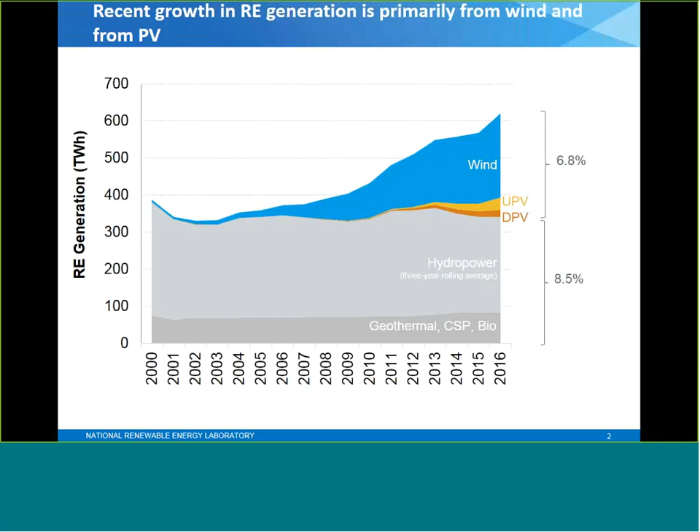So in terms of starting to make projections for the future and what that might look like, we always start with cost and performance projections. That is our companion product to this standard scenarios work, our annual technology baseline. This is using our 2017 version - these are NREL's cost and performance projections for electricity sector generation technologies through the year 2050.

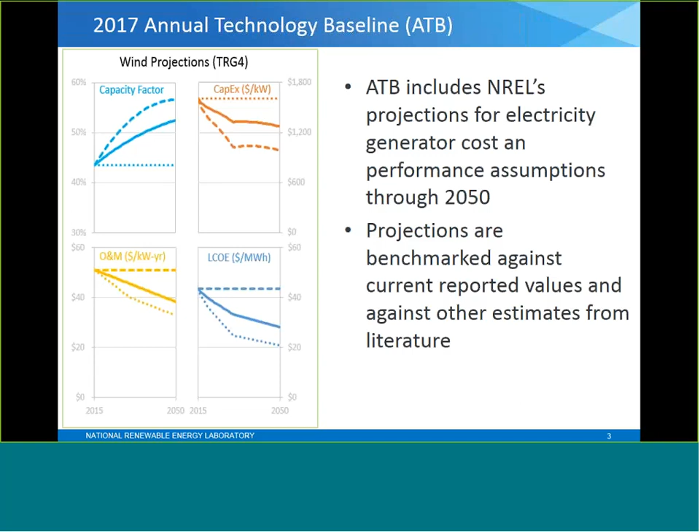So we spent a lot of time developing these projections, benchmarking them against other current reported values from the market, as well as other estimates reported in the literature, and this forms the basis for making projections into the future. We also pull things like fossil fuel cost projections from the Annual Energy Outlook, and demand growth from there as well, then roll them into our modeling tools.

So we're primarily relying on two models to look out into the future. One is the ReEDS model, the Regional Energy Deployment System, which looks at the bulk power system side of the electric power sector. It has a lot of spatial resolution. We're explicitly accounting for renewable energy integration constraints, and representing transmission.

And then for the distributed side of things, we're using the dGen model, or distributed generation model, that looks at a county level resolution, looking at individual customers and how they might or might not adopt distributed PV. So the combination of these two things, we take all of our annual technology baseline cost and performance pieces, run them through our models, and create this ensemble of scenarios.

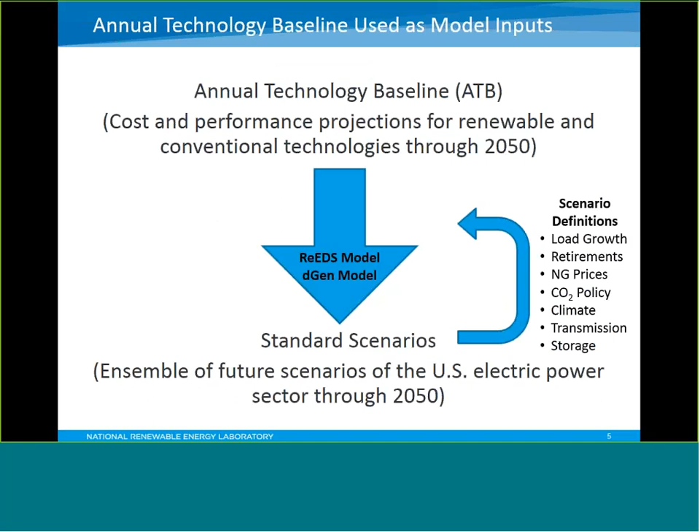And we have a lot of different kinds of scenarios that we look at. Things like differences in load growth, different retirement scenarios, natural gas prices, CO2 policy, climate scenarios, transmission scenarios, storage cost scenarios. So we've got a whole bunch, I think there were 26 scenarios we looked at, really looking across the range because we know that the future is not a single line. Well, it will eventually become a single line, but it's hard to say what that single line is. So we want to look at a wide range of futures to see what kinds of trends show up consistently across many different scenarios.

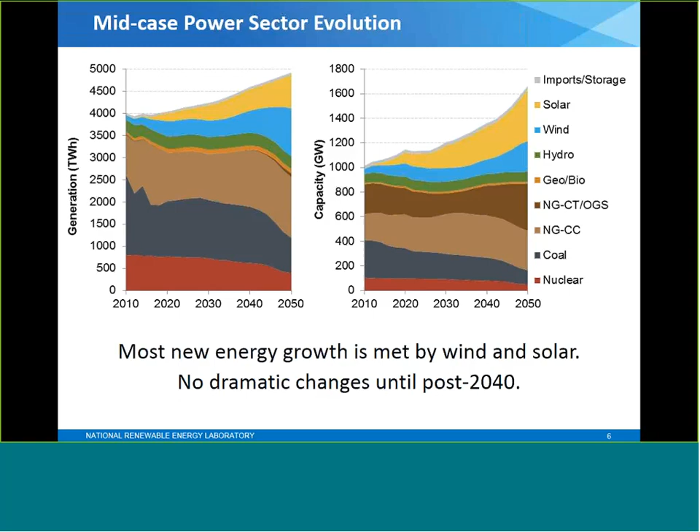Hey Wesley, so do we see some states having over 50% renewable energy in that bottom figure? Is that what I'm seeing? Oh, certainly - you look at Iowa there, and it's well over 50%. It's obviously exporting quite a bit of that energy to other regions, but of its total generation mix, it's definitely exceeding well above 50%.

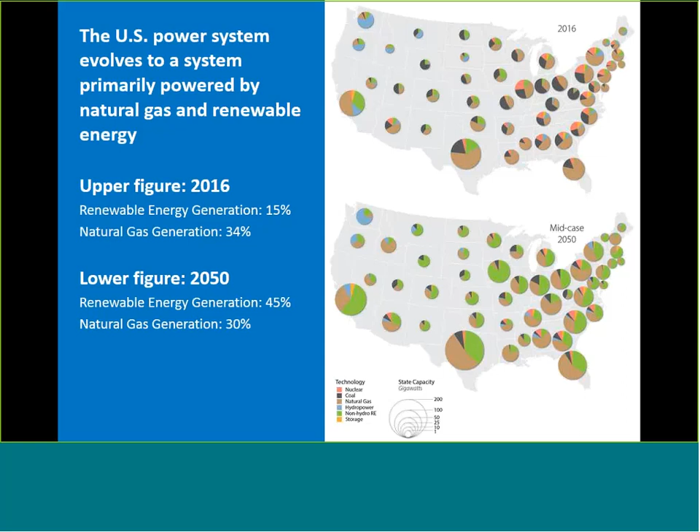There's only a very few cases where it stays flat for a long period of time, typically where renewable energy costs don't change from today's prices, or where natural gas prices stay extremely low in the $2 to $3 range for 20 or 30 years. So there's a lot of potential here for renewable energy.

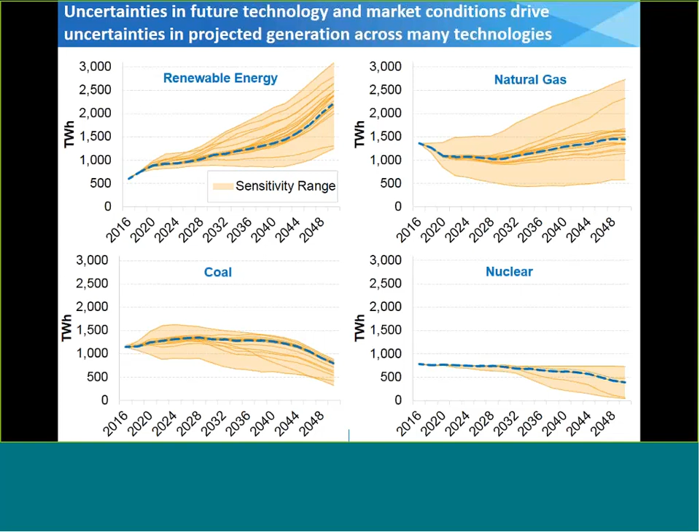This has a lot of promise for renewable energy. Renewable energy wouldn't just be competing against other new resources, but if you're now competing against natural gas fuel prices, you could compete against existing resources on the grid. That gives a whole different dynamic for what could happen with renewable energy deployment into the future.

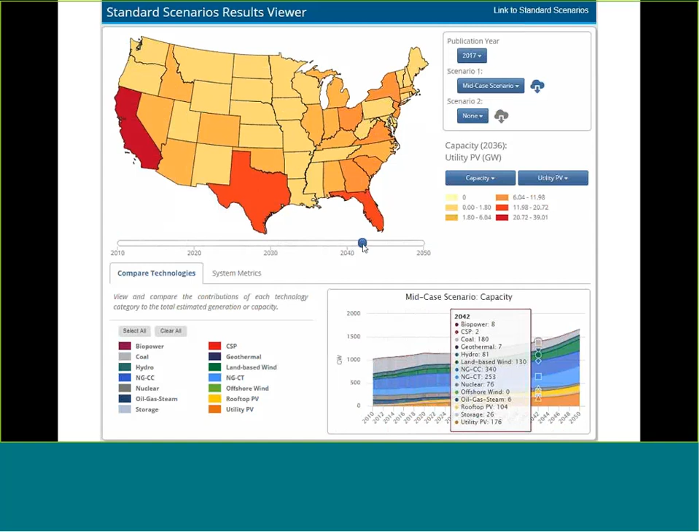Here we're showing state-level utility PV capacity over time. You could look at other scenarios, compare scenarios with each other, look at different technologies. This is all available for you - you can download the scenario data and look at it in more detail. We encourage you to go look there. I'll close out by providing you the links to the full report as well as to the viewer itself, where you can get this data.

And feel free to follow up with me if you have any questions about any of this material, or if you just see things in there you're really interested in talking more about. I'd be happy to engage with you there.

Yeah, Wesley, while we do the transition to get Jennie queued up, we had one question from Drake Bartlett. He asked about the coal generation we saw in your graph, and I think his question was originally about capacity, but you're showing energy. If we look at that graph, we see a slight increase in generation from coal plants between about 2024 and 2036 or so. Is that attributed to increased utilization, or do you actually anticipate coal capacity getting added in the mid-case?

No, that's a good question. So yeah, we don't see any new capacity additions for coal in any of these scenarios. It's hard to build a new coal plant. They're relatively expensive, but the increased generation is essentially from additional utilization of existing coal plants. This is mostly because natural gas prices are assumed to come up slightly in our reference case, and if they do come up, that gives coal a bigger advantage versus natural gas in a 10 year time frame.

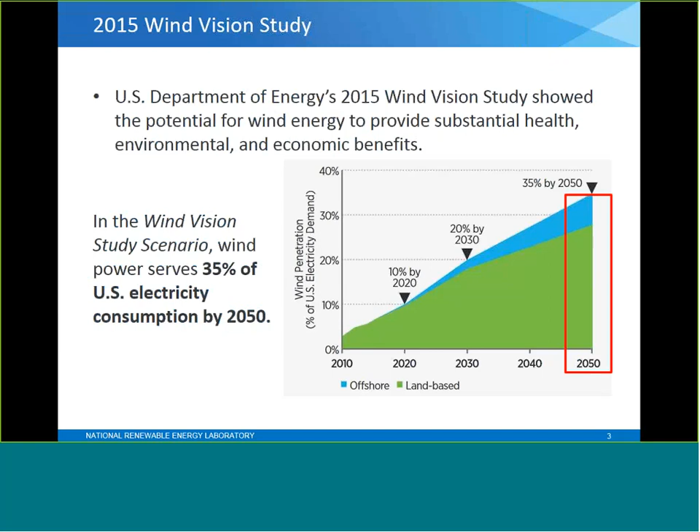For the remainder of the presentation, I'll be focusing on that final year, 2050, which shows the high wind penetration. As you can imagine, if the U.S. is going to achieve 35% wind, the regional penetration of wind could be substantially different than that. Particularly in the middle of the U.S., where we have a really good wind resource but less load than on the coast, we see penetration levels upwards of 50% in the Wind Vision study.

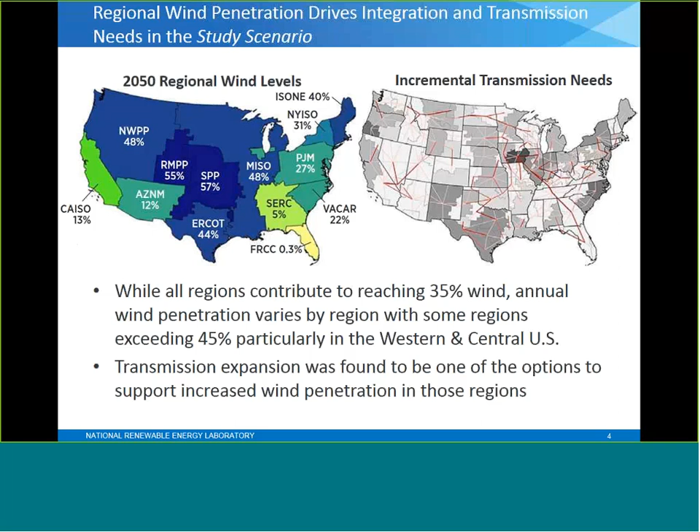So as you can imagine, the Wind Vision study found that transmission would be an important part to support increased wind penetration in those regions. Following on to that, we did some work here at NREL looking at the ability of the grid to operate such a high level of wind system.

So we did follow-on analysis by creating a Wind Vision-like scenario of the western U.S. I should note the reason why we didn't look at the entire U.S. like the Wind Vision study did was because with the high level of fidelity we wanted in our modeling, the whole U.S. isn't at the moment computationally tractable. NREL is working on that, but in the meantime we stuck just to the western part of the U.S.

As you can see from the map, wind penetration varies substantially by state, with really high wind levels in those Rocky Mountain states of Montana, Wyoming, and New Mexico.

So we wanted to analyze the operation of the grid at an hourly level, so we used a unit commitment and economic dispatch model that's commercially available called PLEXOS.

And to use PLEXOS, we start with a database of the Western Interconnection that incorporates every generating unit within the footprint, details about those generating units such as maximum capacity, heat rate, ramp rate, et cetera, along with the transmission network topology, including expected transmission builds through year 2030.

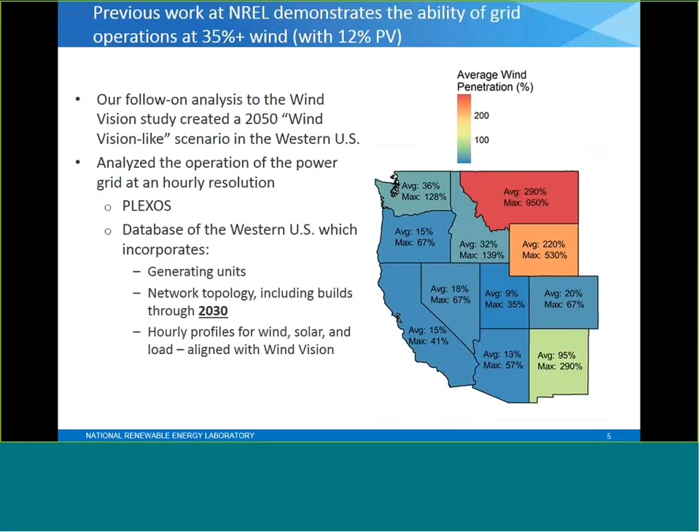The first thing you can imagine is that when we're looking at the network topology of the year 2030, but wind levels from the year 2050, we might have some wind integration issues.

So we also analyzed 3 transmission build-out scenarios that are shown on the top maps of this slide. Our first transmission build-out scenario, we added 4 new lines that have actually been proposed for the western U.S. to facilitate wind energy deployment.

And then we further added on to those scenarios with our second and third transmission build-outs. And what we saw when we do an annual run of the operation of the power grid, one of the results of interest is annual renewable energy curtailment. That means renewable energy that is available to be used but can't, for various reasons.

One of those reasons could be the inability to get wind from where it's generated to where it's needed, or it could be an inability to turn down your conventional generator fleet. So there's a lot of things that could drive curtailment, but we found in this case, with our transmission builds, we were able to substantially reduce that curtailment.

In fact, we did a bounding scenario called the copper sheet scenario, where we eliminate all transmission constraints, and what we found was less than 1% annual curtailment. So that really indicates our results that in this case, our curtailment was almost entirely being driven by lack of available transmission.

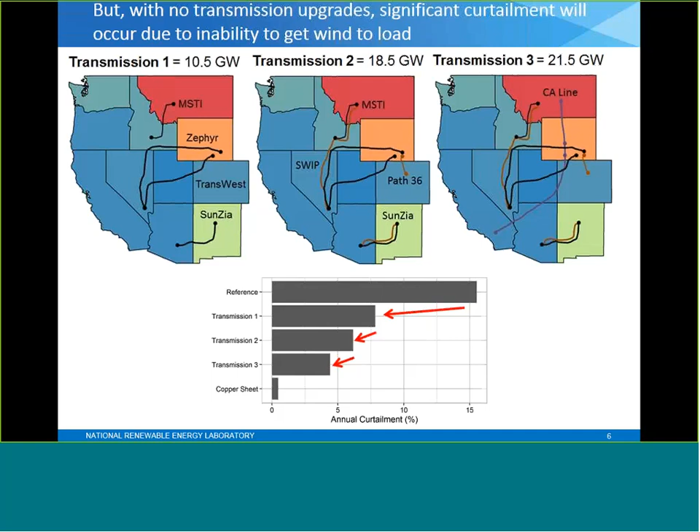So while the transmission build-outs from the previous slide that we evaluated in that study might show very favorable economics, or seem like no-brainers from the standpoint of integrating wind energy, there are other substantial barriers to building large-scale transmission.

Siting, regulating, permitting can all be a real challenge when you're trying to travel potentially thousands of miles with tons of metal. And another real issue is evaluating who's going to pay for the line to begin with, and then how do you allocate those benefits once the line starts being used.

So another possible method to combat wind curtailment is energy storage. You can potentially avoid some of those issues that you might have from transmission. So we set out to evaluate whether batteries plus wind would make sense.

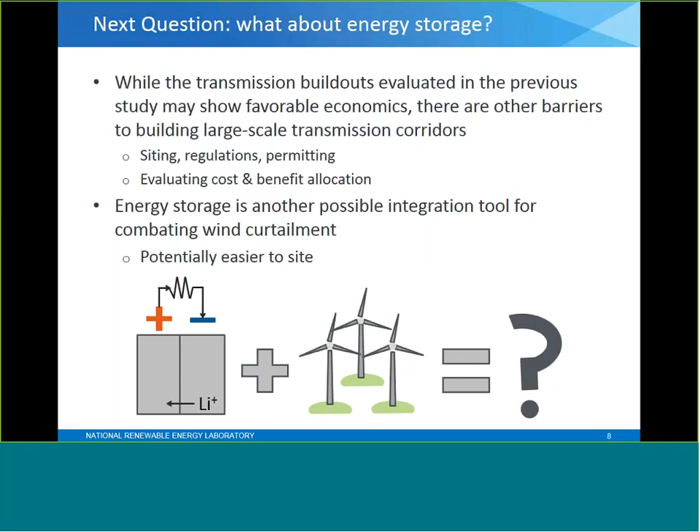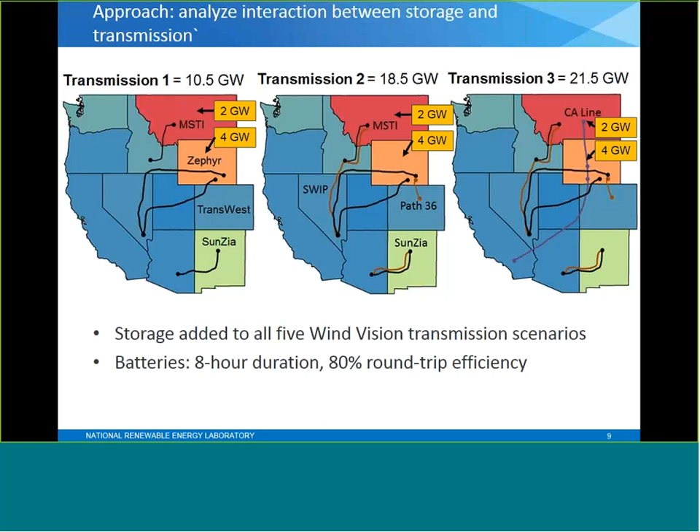Our approach was to start with the same 5 transmission scenarios we've just been discussing, and then add 6 gigawatts of energy storage to each of those scenarios — 2 gigawatts in Montana, 4 gigawatts in Wyoming. These are long-duration batteries with 8 hours of duration and an 80% round-trip efficiency. We basically did the same annual simulation for all of those runs.

Our first result shows the annual renewable curtailment, as we've been talking about, for each of these runs. Our first result was really that both energy storage and transmission reduce curtailment, but transmission is more effective. On the y-axis we have renewable curtailment, and on the x-axis we have our 5 transmission scenarios. What we find is that, shown in purple, transmission is very effective at reducing curtailment. Storage is also effective, but especially compared to the base case, it's just not nearly making the same dent that transmission is.

The reason for that is that wind has extended periods of curtailment — they last longer than 8 hours. In our base case, 40% of the curtailment events lasted longer than 8 hours, and the longest one was about 330 hours. So storage can charge for the first 8 hours of that event and then has to just sit idly until the end of the event before it can discharge its energy. That really cuts into the capacity factor for storage and thus how useful it can be for combating curtailment.

In addition to that, even if storage could constantly charge and discharge, it has a theoretical maximum capacity factor of around 40% due to those efficiency losses, whereas your utilization factor of transmission lines could be substantially larger.

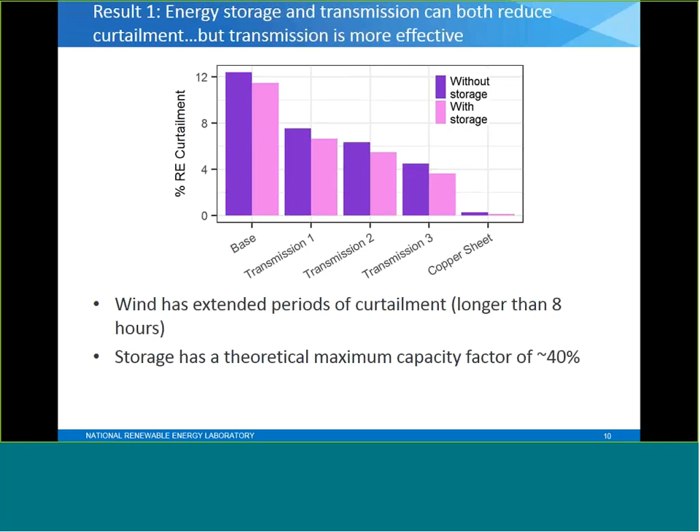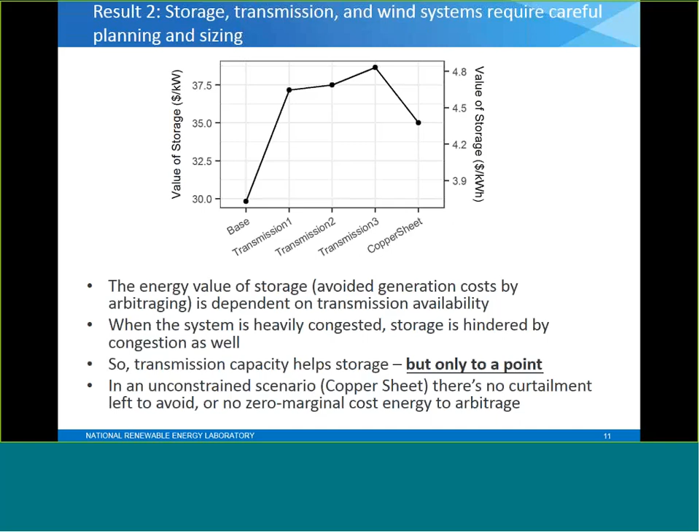Our third result is that it matters where storage is located. For this sensitivity, we took that 6 gigawatts of storage and moved it from Montana and Wyoming, where the wind is, to Southern California, where the load is. Southern California has expensive gas generators that have to turn on to help serve their peaking load, so we wanted to see how storage could impact the system there.

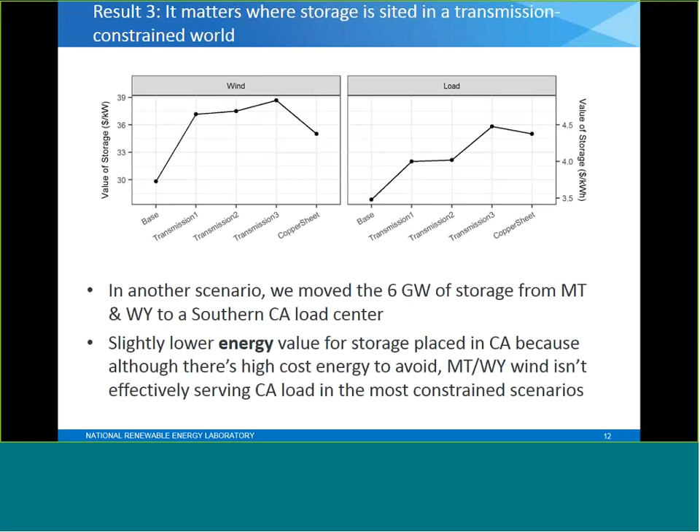The plot on the left-hand side shows the same graph we were looking at on the previous slide. On the right-hand side is when we move that storage to California, and what we find is a slightly lower energy value for storage placed in California. This is because even though you can displace high-cost energy in your congested system, your Montana and Wyoming wind isn't effectively serving California load, meaning you can't take advantage of that cheap energy to arbitrage against.

Finally, the energy value of storage alone does not seem to be enough to justify the capital cost of storage. So in agreement with previous studies, both here at NREL and other places, there's still just a relatively small value for storage providing arbitrage, and it just can't justify the current capital cost of storage, and even some of the most optimistic costs into the future.

But it's important to note that we didn't include other important sources of value for storage, including capacity value, or the ability to displace conventional generator builds, or the value of providing ancillary services. These additional value streams would also be dependent upon location and transmission availability, just as energy value is, so this would be an important area for future work.

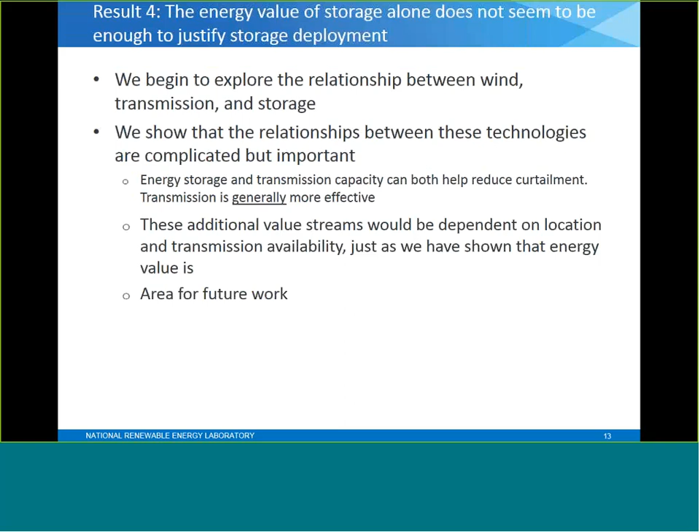So to conclude, we've begun to explore the relationship between wind, transmission, and storage. The relationships between these technologies are complicated, but pretty important. Both energy storage and transmission can help reduce curtailment, although transmission is generally more effective just due to the curtailment patterns of wind in this study. But energy storage and transmission do fall in a virtuous cycle, meaning they help each other out—the sum of their combined value is greater than the sum of each of the parts.

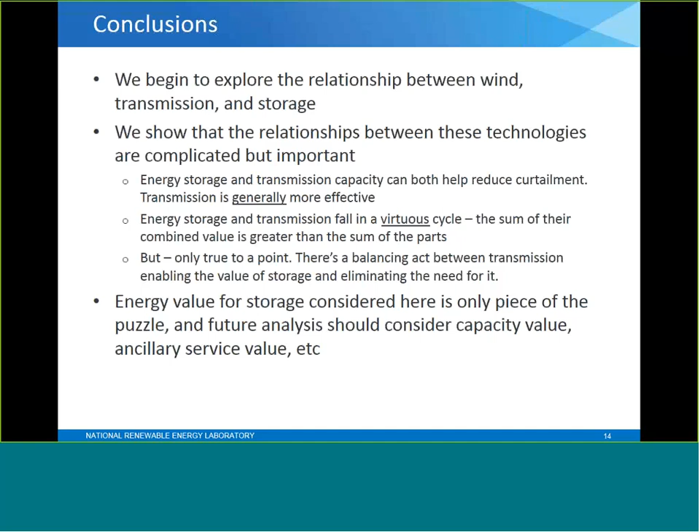However, that's only true to a point. There's a balancing act between transmission being able to enable storage to provide more value with arbitrage, and then completely eliminating the need for it. But again, the energy value we consider here is just a piece of the puzzle. Future analysis should look at the trade-offs between capital cost, capacity value, ancillary service value, et cetera.

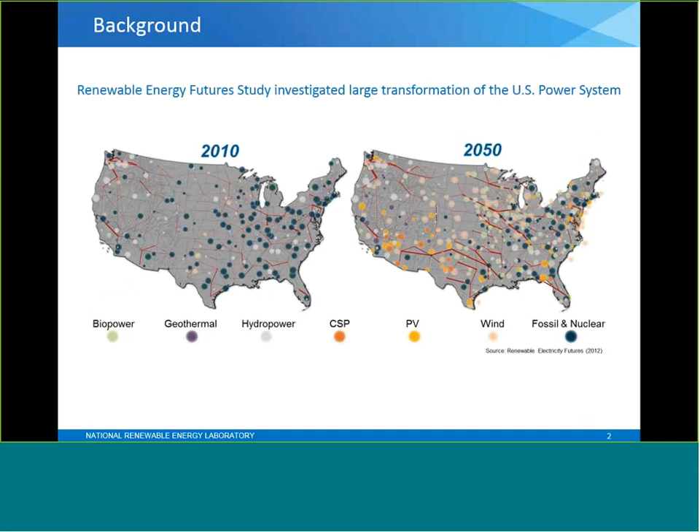Then another study that we're building off of here - one of the questions left unanswered from that study is what might happen sub-hourly in higher renewable penetration scenarios, and that's one of the key questions we're getting at here.

The next slide here looks at the Eastern Renewable Generation Integration Study. This study provided a lot of the inputs, the methodology, and the types of analysis that we're doing in this study. So we're building off of this study, which looked at up to 30% penetration of renewables, and we're going substantially beyond that, as the definition of high penetration has been changing over the last 5 to 10 years, and we're trying to look at some of these higher penetration scenarios.

There's one more study we built off of here to produce the scenarios and analysis in this study - the 2016 version of the standard scenarios that Wesley was just talking about. These scenarios are not an exact representation of any of the standard scenarios, but somewhat crafted based on the highest penetration scenario, the 80% renewable penetration scenario from the 2016 standard scenarios analysis. So we're a blend of those three things to create the scenarios and define some of the questions we're addressing in this analysis.

This slide shows what the base scenario looks like in this study, and we also looked at a penetration level that was 10% higher than this in terms of wind and solar penetration. You can see the transmission build-out on the top right, and the layout of the regions on the bottom right.

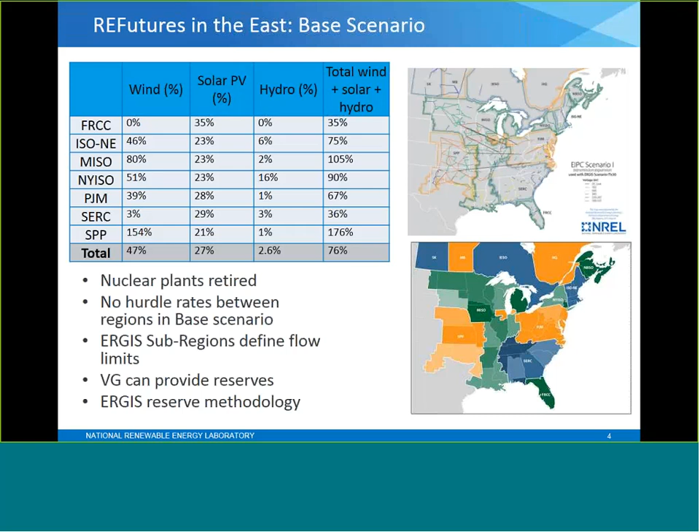For the base case, our flow limits are defined by the ERGIS subregions. We have no hurdle rates between the regions, so we assume a very efficient flow of electricity throughout the Eastern Interconnection. We assume variable generation, wind and solar PV, can provide reserves if it's curtailing, and we also assume reserve methodology from ERGIS.

We did, in addition to this base scenario, look at other questions about how these conditions might change with different assumptions. So we looked at a higher VG penetration scenario. We also looked at a scenario that did have hurdle rates, which would represent wheeling charges or any friction that might occur based on the exchange of power between two regions.

As I mentioned, we looked at a scenario where the baseload was less flexible, assuming about a fourth of the baseload generation had zero flexibility whatsoever and imitated nuclear units in today's world. We also looked at a scenario with a local conventional generation limit, where 25% of all regional load must be served by local synchronous machines, so thermal or hydro resource. Those questions kind of bounded our analysis in terms of what if we don't have this amount of flexibility going forward.

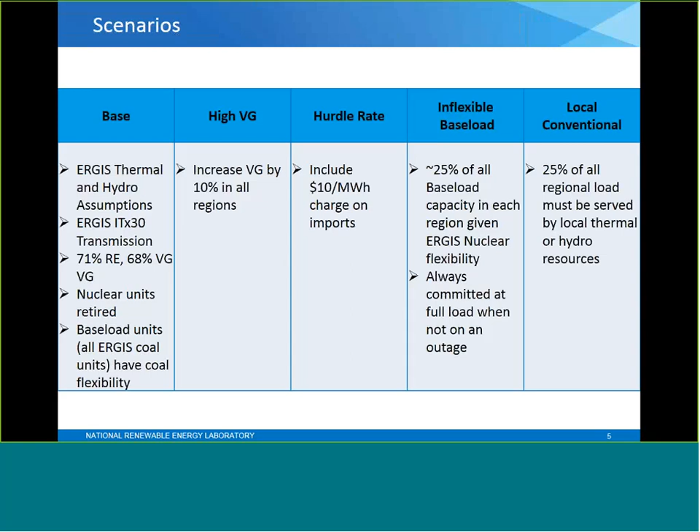I also wanted to give a shout out to the implementation that Josh Novacheck implemented for this, and I forgot to acknowledge him in my title slide, but Josh has done a lot of the work in terms of the modeling and implementation for this study, so thanks, Josh.

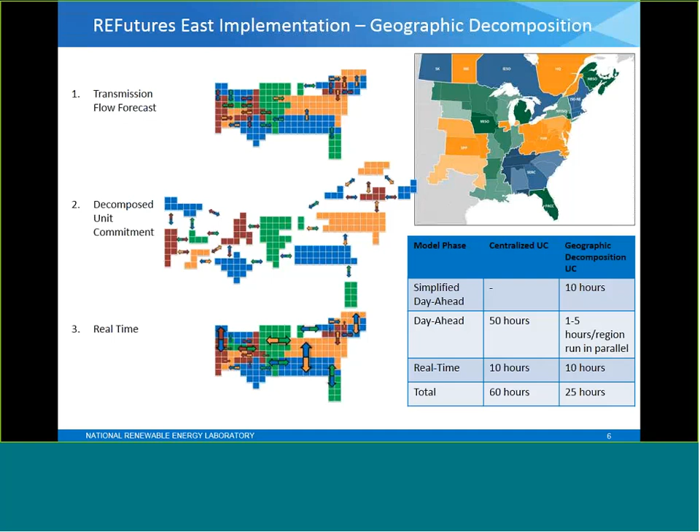Step one is a transmission flow forecast. It's a very simplified commitment and dispatch of the Eastern Interconnection, and the only thing we save from that simplified run is the flow between regions. Number two is the day-ahead decomposed unit commitment: we take the problem apart into its regions, solve that problem with the day-ahead unit commitment, and then step down into step three, which is the real-time dispatch. So again, it saves us some time and also potentially represents reality a little bit better.

Some summary results of what we're looking at here: the system did balance, and I think we served more than 99.9% of all reserves. There was one situation in Florida during the inflexible baseload case where we saw a little bit of load dropped, but that was based on a large day-ahead forecast error that translated through to the real time as lost load, but in reality would have been caught by any intraday decision making.

So one of our take-home messages here is that you don't want to run your system based only on day-ahead and real-time dispatch. You want to be making some decisions in the intraday time frame, and we'd like to look at that more in the future. And when we did implement more like an intraday forecast for that day, all of the lost load went away.

So that's more of a modeling artifact than reality. But we did serve a vast majority of the reserves and all the load.

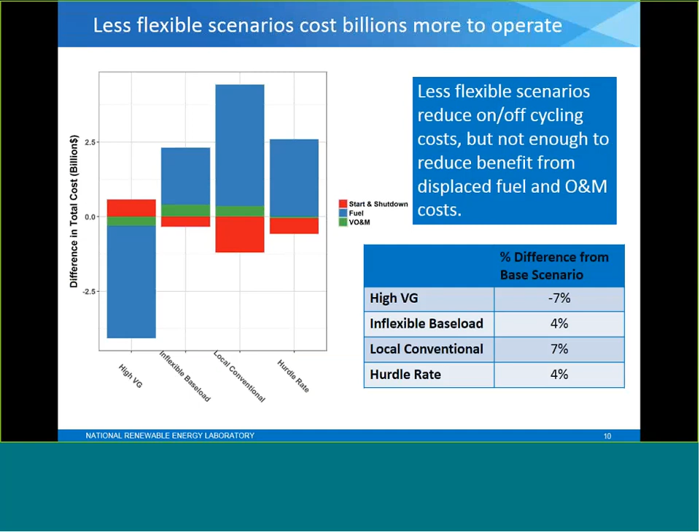One thing we set out to address in this study is to look at some of the metrics around system stress. System stress is a challenging thing to define, but what we looked at here were two different definitions of stress. One would be economic stress, which is basically the VG curtailment, which causes you to not generate from your wind or solar generation, and therefore you have to cover that with thermal-based generation that costs money to operate.

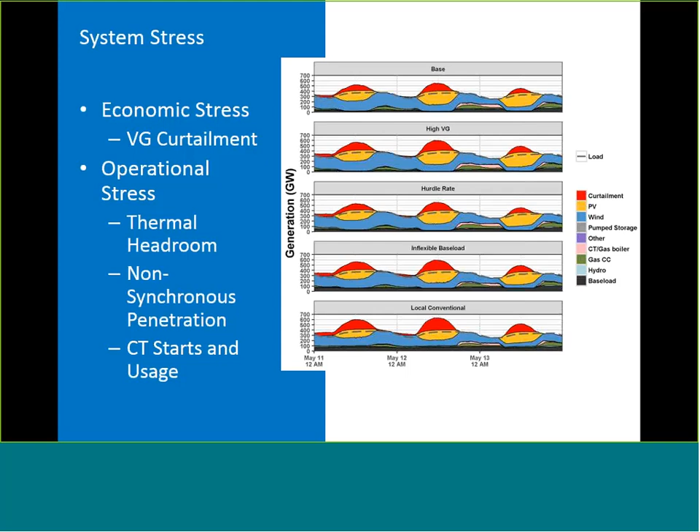The other is operational stress, and some of the key metrics we were looking at include the headroom that's available, or the difference between the capacity and the generation level at different plants throughout the system, and the penetration of non-synchronous generation, which includes the inverter-based wind and PV generation. There are questions about inertia and voltage stability that can be informed by looking at this non-synchronous penetration, and also the starts and usage of your CT generation.

Relatively speaking, this translates to less than the 7 to 14% curtailment in these different scenarios. But you do have certain hours that have very high levels of curtailment, and that's defined as much by the assumptions about flexibility as it is by the actual VG penetration, as you get to a limit in terms of how much VG you can handle based on your load and your required generation.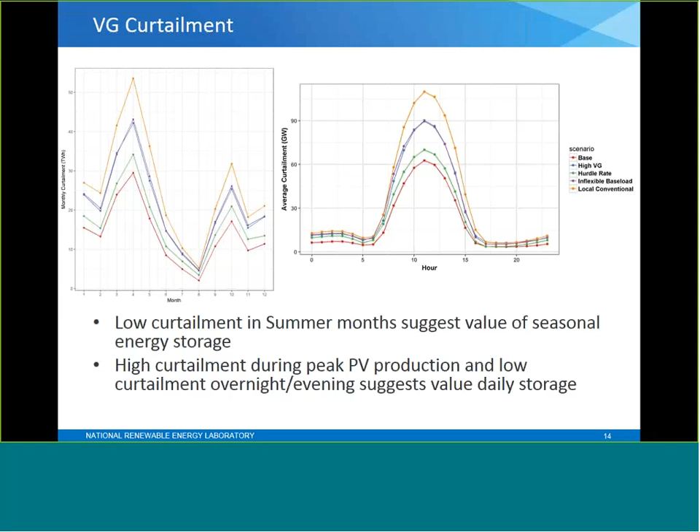This slide shows the VG curtailment both diurnally on the top right and throughout the season, throughout the year in terms of the months. What you can see is that curtailment is at its minimum in the summer and also in the overnight hours, as you can see a strong solar profile to the curtailment in the figure on the right there. So both of these things suggest that additional storage, both diurnal storage and seasonal storage, could potentially be helpful to mitigate some of this.

So to transition into the more system stress related metrics, this is a look at the VG curtailment for every hour of the year in the different scenarios. On the y-axis is the actual curtailment that came through in real time, and on the x-axis is the scheduled curtailment. So the question we're looking at here is what percentage of that curtailment was unexpected in the day ahead. What was a surprise for the system operator?

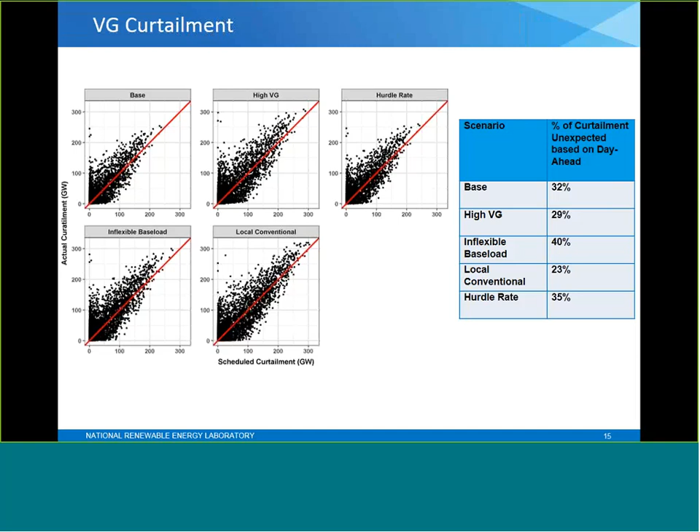Anything that falls along the red line is exactly what was expected, and anything above the red line is more than what was expected. That's also described in the numbers in the table there, and you're seeing approximately a third of the curtailment was unexpected from the day ahead. So we're curtailing more than we thought we were for a third of the VG curtailment.

This next slide looks at the headroom. This is the headroom of undispatched online thermal capacity or curtailed VG that can provide headroom for an increase or an unexpected increase in the load or the net load. What you see here is that, by region, you can look at the different amounts of headroom.

Some of this is defined by the reserve requirements, which require that a certain percentage of the generation be online, and that's where we see some of this headroom kind of limiting out. If you look Eastern Interconnection wide, the amount of headroom never goes below about 7 or 8%, but regionally it can go a little bit lower than that.

One interesting thing we found here is that scenarios with less flexible operation of the thermal fleet do not protect the system against low headroom conditions. So you see similar low headroom conditions in all of the different scenarios, including the local conventional scenario.

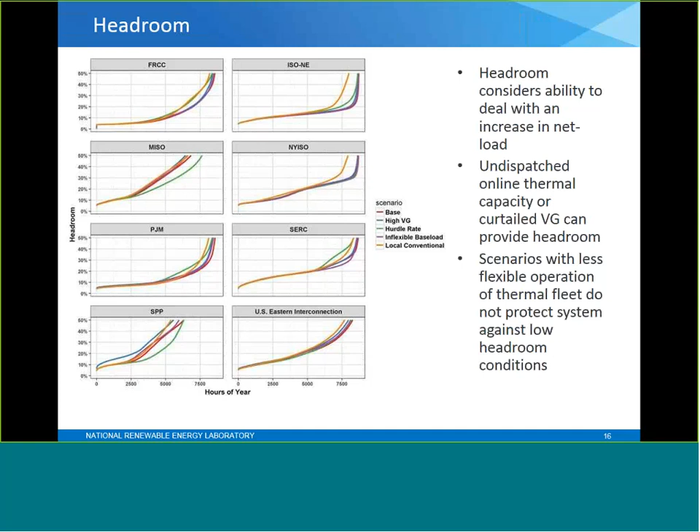Next we looked at the non-synchronous penetration levels, so it's the same duration curve by region, and we looked at these non-synchronous penetration levels, and we found that the less flexible scenarios actually do have some impact on the maximum non-synchronous penetration levels.

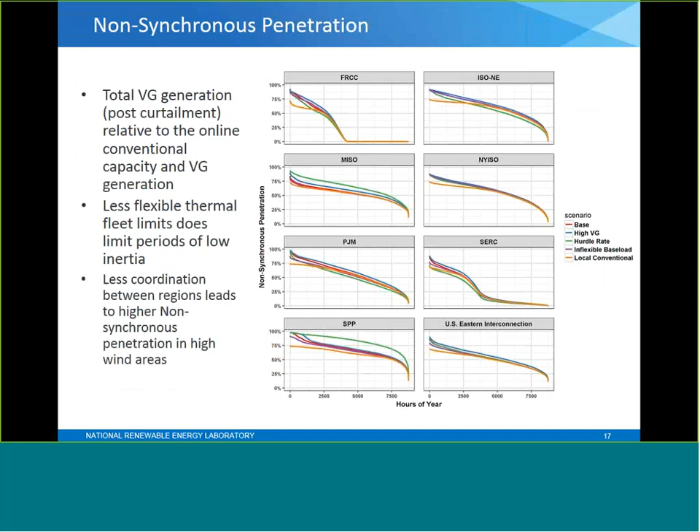In some ways this is defined in the local conventional scenario. You can never go above 75% penetration because that was the constraint we put in. But even the inflexible baseload and the hurdle rate scenario do protect some regions against these types of conditions. Again, inertial questions are not considered here, but this is just a metric to take a look at it.

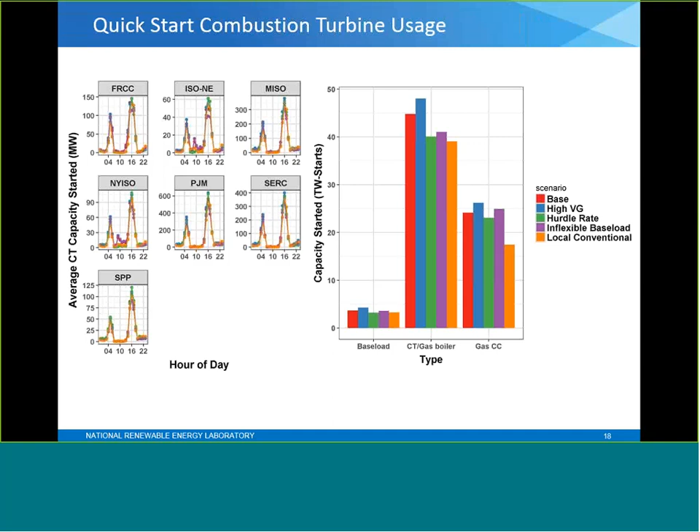This next slide is the usage of quick-start combustion turbines. You can see here that in the different scenarios the usage of these resources is pretty similar between scenarios, and also has a very strong diurnal shape in all of the different regions, starting some of that generation as the load picks up in the morning before solar generation picks up, and also in the evening, especially when solar generation falls off and the load is still there.

This is another strong indicator that using some kind of intraday decision making could be very important in a future scenario with high penetration. This last slide looks at some of the conclusions, and I've already basically stated all these, and we're running a little tight on time, so I think I'll leave it at that. Put these up here, and I think we're ready for questions.

So basically what we found is that EVs that charge during the day could really help absorb some of the excess solar energy in California. That could look different for pairing with wind or in other renewable scenarios, and the devil is in the details. You might need to design smart time-of-use structures or be available for utility-controlled charging. Implementation is challenging, but EVs could be a real resource for helping integration, or they could also be another challenge.

Yeah, and I think we've got two other studies that we're working on right now. They're going to look at electric vehicles in detail. The first one is run by Trieu Mai out of NREL and is called the Electrification Futures Study, where we look at large-scale load growth in the United States, but decreased carbon in the United States at the same time. And we've also got a new study that we're launching with the City of Los Angeles Department of Water and Power that's also going to look at electrification of large portions of the transportation infrastructure.

So great question, Tom. David Jacobson out of Manitoba, here's his question for us. I think this one's for Jenny. Is there any pumped hydro in the Pacific Northwest? Can you use this to increase the capacity factor of the north-south DC ties?

Anybody know if we have any pumped hydro up in there? I think there's some, but not much. Yeah, mostly in California. I think it'd be interesting to ask that question also in terms of, in addition to pumped hydro, the existing hydro fleet and how it could be operated more flexibly to take advantage of some of those north-south ties a little bit better. But they have a lot of constraints that they deal with up there in terms of fish, agriculture usage, recreational usage, things like that, which is probably why David asked about pumped hydro as opposed to the overall hydro.

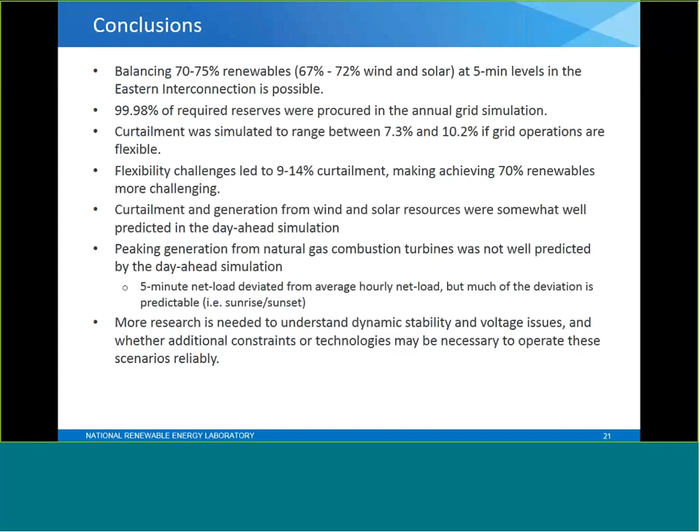ERCOT has demonstrated that curtailed renewables are capable of providing significant frequency response. In the 2050 case, how many hours have curtailed renewables in them? So what was your annual curtailment? Only 7 to 10% on an annual energy basis, but surely higher for some percentage of the hours.

In this scenario, we did allow VG to provide reserves, but we have modeled scenarios in the past where we don't, and when we do both, we find that it is valuable for VG to provide reserves, especially at these levels of high penetration.